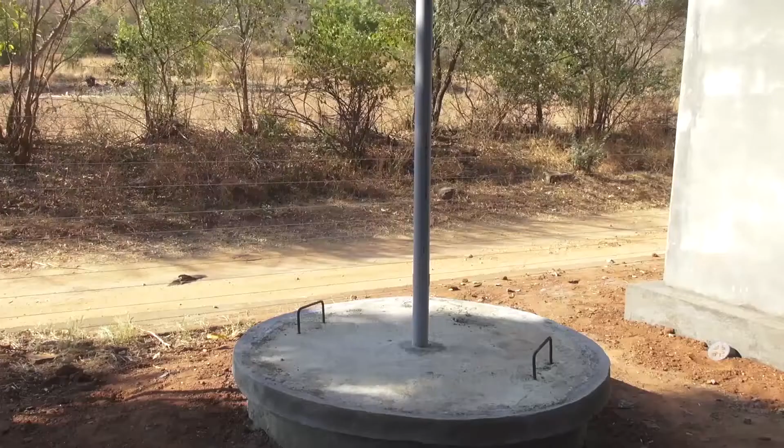Construction of concrete lid for leach pit. Lid covers the top part of the leach pit. It is the gateway for removing the solid waste from the pit. This can be circular or semicircular in shape.

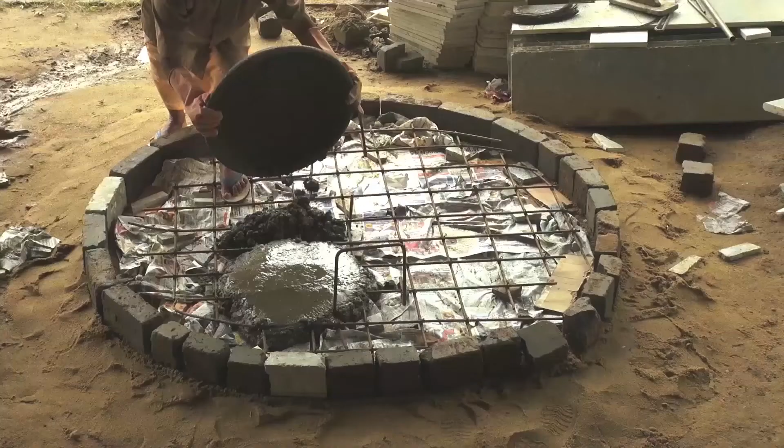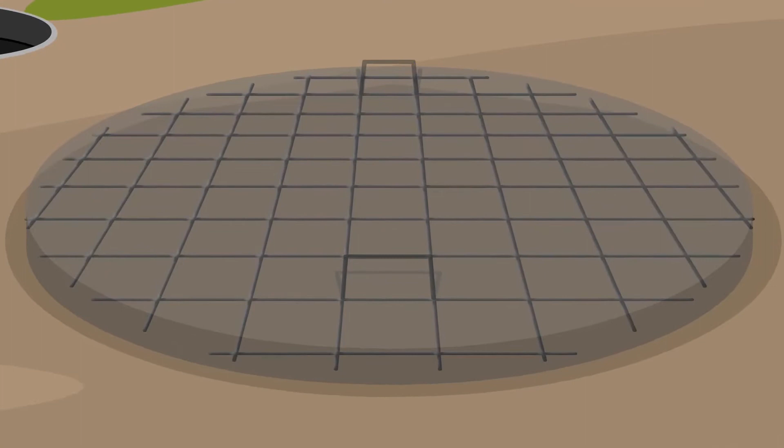In this session, we will see how to construct a concrete lid for the leach pit. At the end of this session, you will be able to construct concrete lid for the leach pit. The concrete lid consists of iron rods placed in a pattern inside a layer of RCC or reinforced cement concrete.

To construct the concrete lid, we will first make an iron mat by placing iron rods of lengths 143 centimeters, 137 centimeters, 123 centimeters, 98 centimeters, and 49 centimeters, horizontally and vertically. The rods are to be placed equidistantly at a distance of 15 centimeters.

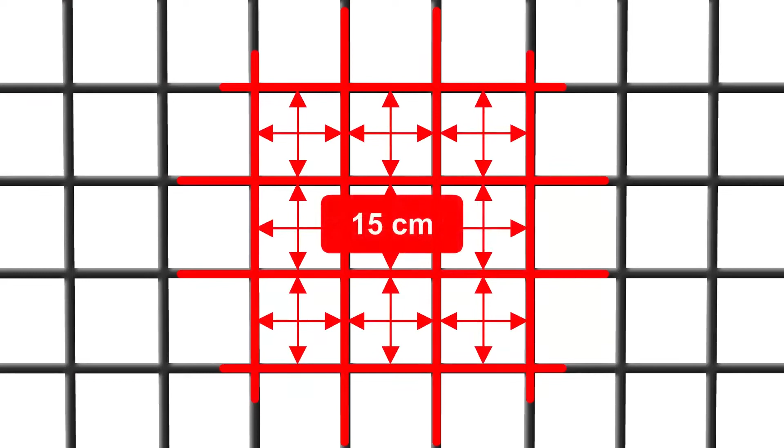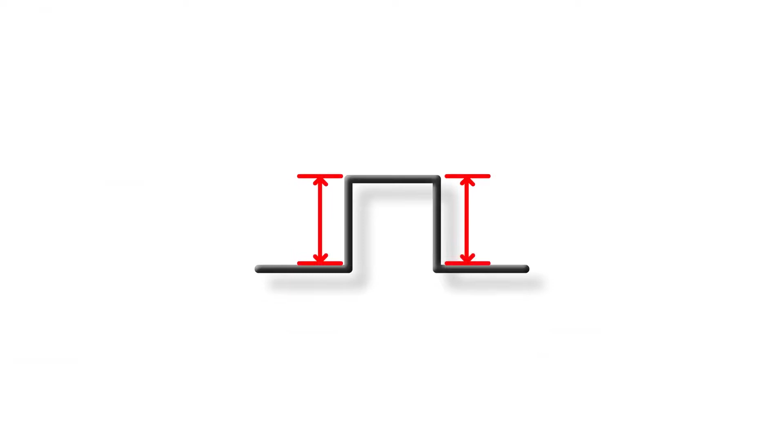Cover blocks of thickness 30 mm are placed below the iron mat. The handles for the concrete lid, with a height of 15 centimeters and a width of 15 centimeters, will be placed equidistantly from the center of the lid. We will then apply a layer of RCC to a thickness of 7.5 centimeters over the iron mat.

Let's take a look at the tools and materials required for constructing the concrete lid. The tools required are measuring tape, binding hook, mortar mixing pan, trowel, hacksaw blade, straight edge, bar bending pin, MS pipe of thickness 1 inch, and a hammer.

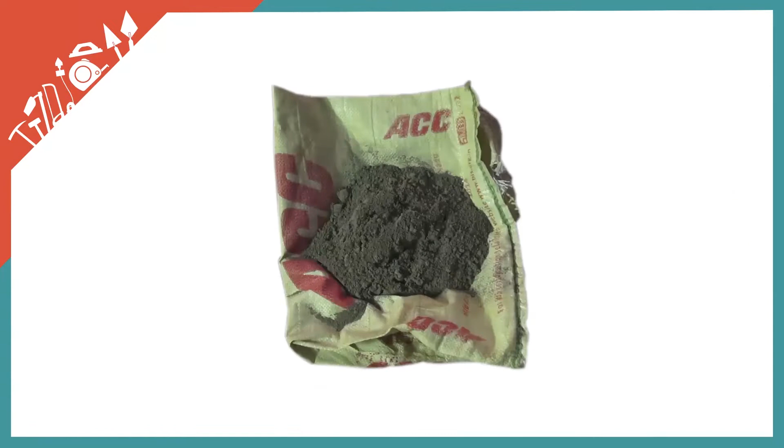The materials required are cement, 20 mm coarse aggregate, sand, 2.5 meters of iron rods of size 8 mm, binding wire, bricks, 30 mm cover blocks, reinforced cement concrete or RCC in the ratio of 1:1.5:3. That is, 1 part of cement, 1.5 parts of sand, and 3 parts of 20 mm coarse aggregate.

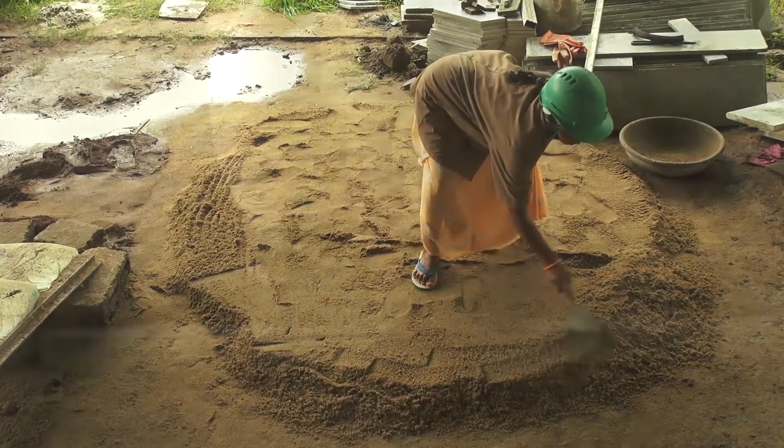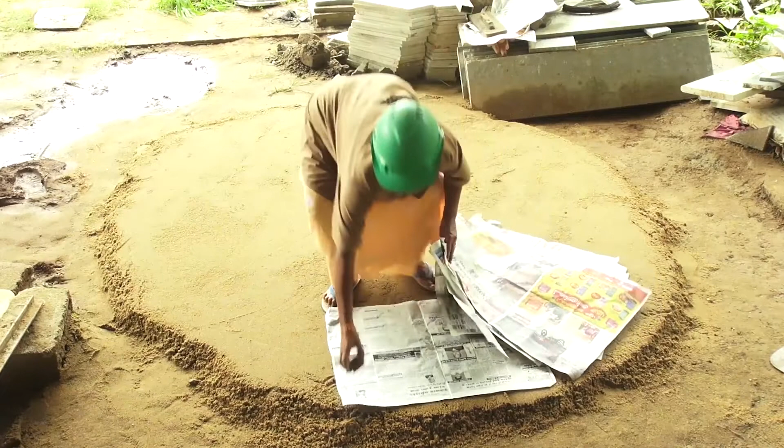Let us now see the steps involved in construction of the concrete lid. First, ensure that you have a leveled surface for constructing the concrete lid. For this, you could spread a layer of sand and level it. Now spread some sheets of newspaper over the leveled surface. Place 30 mm cover blocks over the paper.

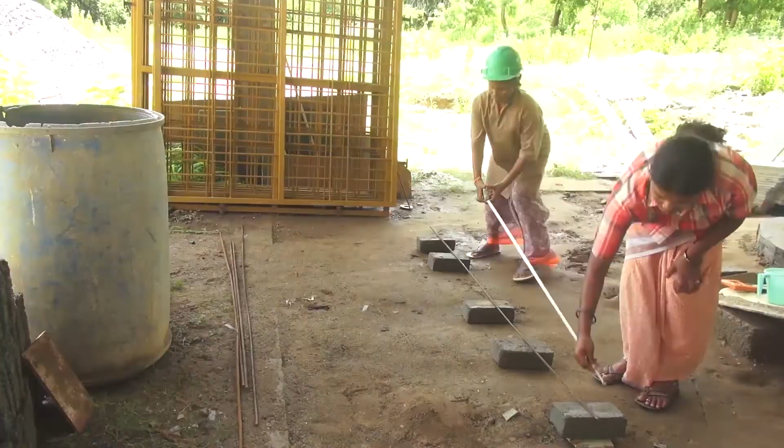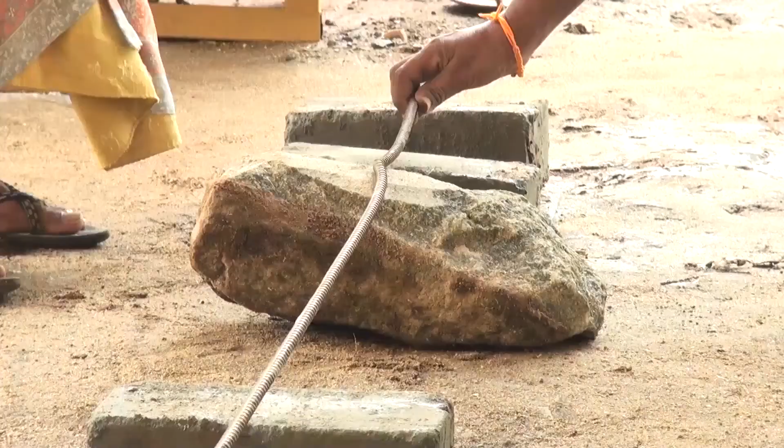We will now cut iron rods to the required lengths. Place the iron rod over a height and with the help of a measuring tape, mark a length of 143 centimeters. Now make a deep cut over the iron rod with the help of the hacksaw. Finally, cut the rod with a chisel as shown. Now straighten the rod with the help of a hammer.

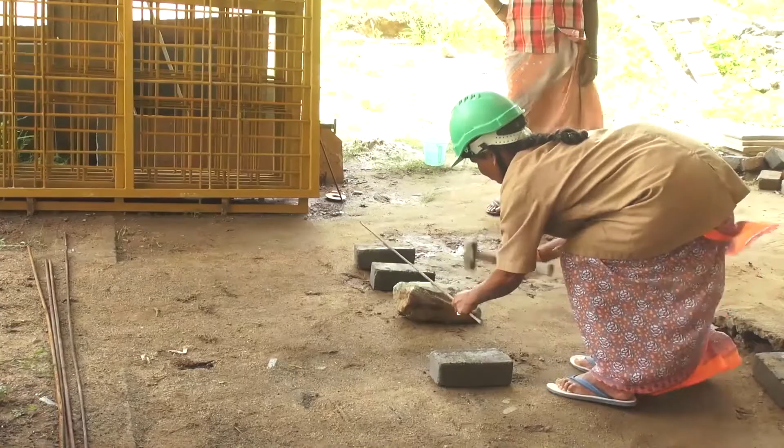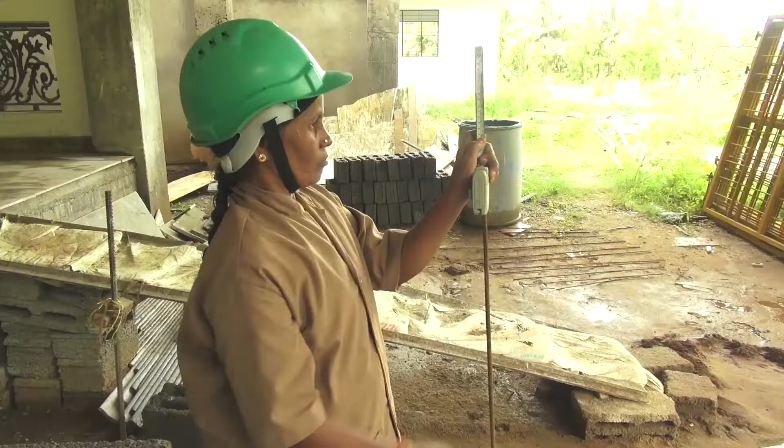We will require 4 rods of length 143 centimeters, 137 centimeters, 123 centimeters, 98 centimeters, and 49 centimeters. Mark lengths of 15 centimeters on these rods from top to bottom. This is required for placing them equidistantly as per the plan.

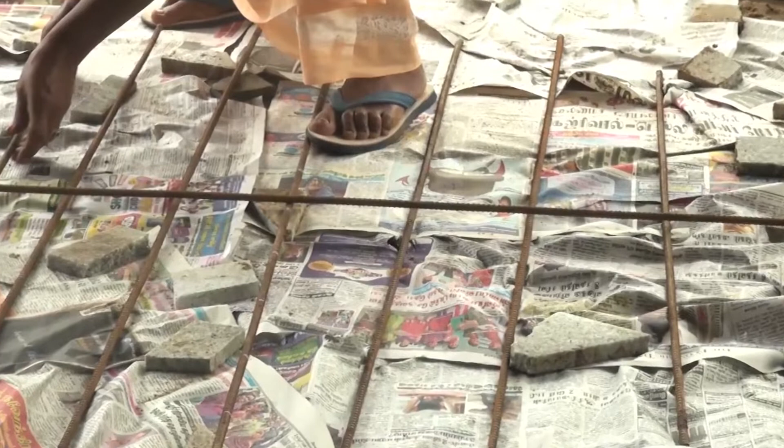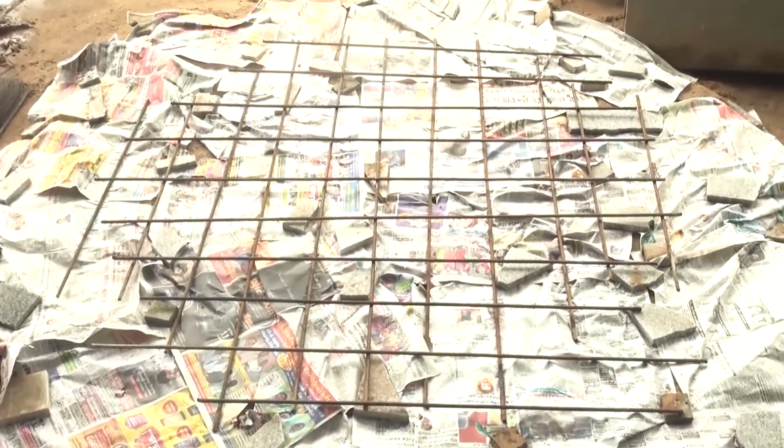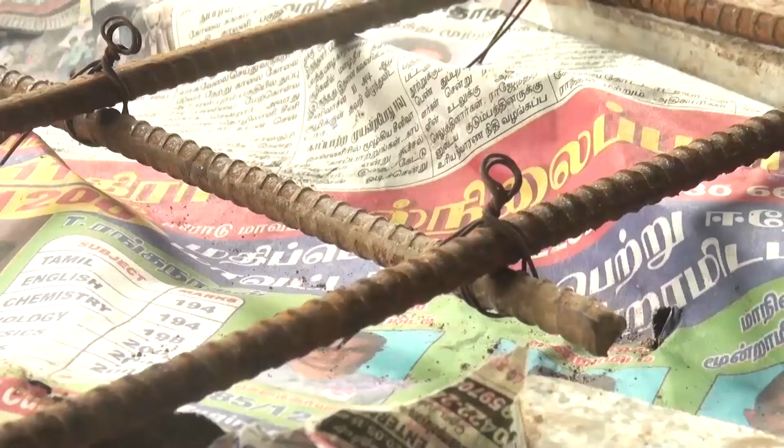Now let us see how to place the iron rods to form the iron mat. Place the iron rod of length 143 centimeters on the cover blocks horizontally and vertically. Place rods in the descending order of length from the center rod vertically on either side. This should be placed at a distance of 15 centimeters. In the same manner, place the rods horizontally. Using steel wire and binding hook, join the horizontal and vertical rods at the intersections. We have now made the iron mat for the lid.

We will now draw a circle to place bricks at the circumference. For this, fix a rod at the center of the iron mat. Tie a thread to it. Measure and mark 75 centimeters on the thread. Now draw a circle of radius 75 centimeters.

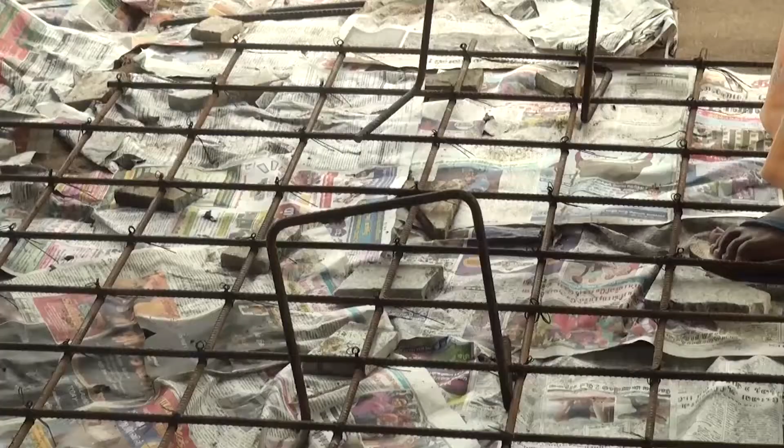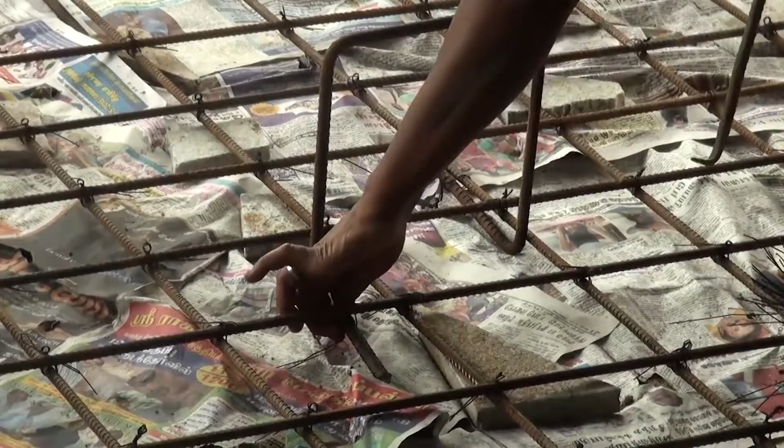We will now fix handles to the iron mat. Place two handles at an equidistant point from the center of the iron mat. Now join the handles to the mat. Now we will pour RCC over the iron mat. Start placing bricks of thickness 7.5 centimeters at the circumference of the circle drawn earlier.

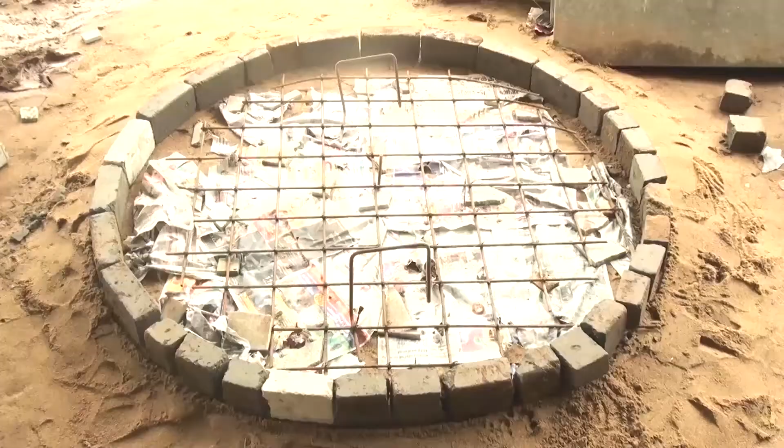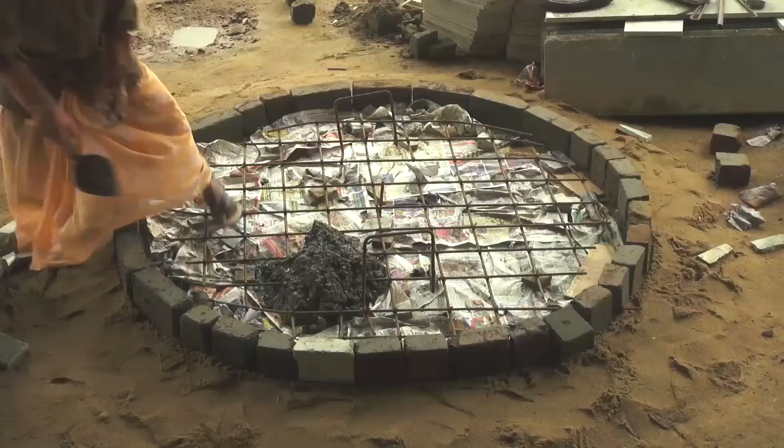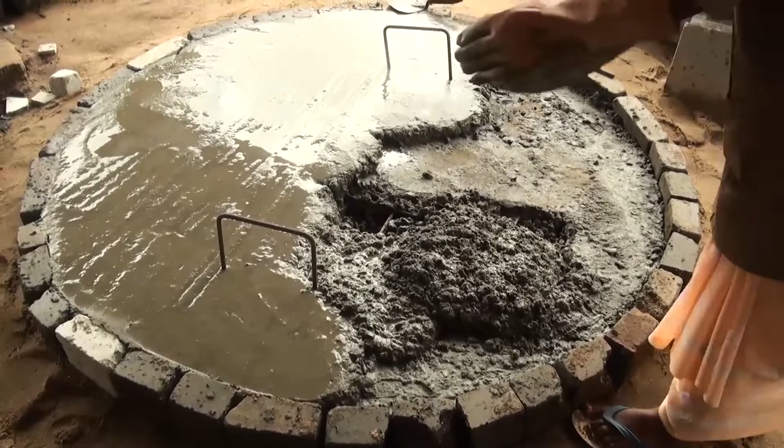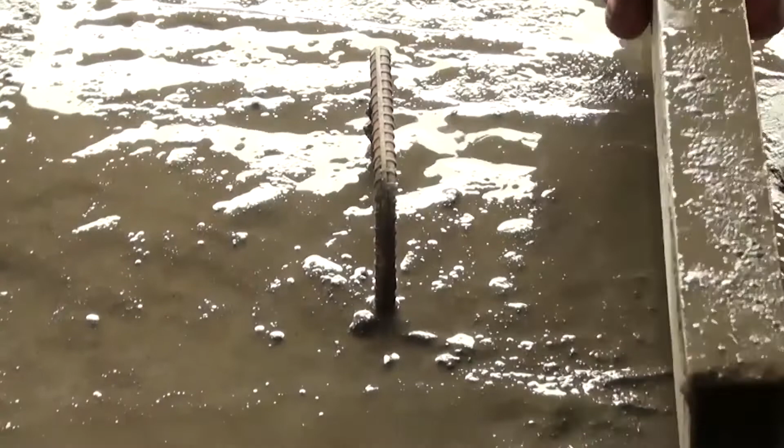This circle made of bricks will be the area for pouring the RCC. Pour RCC over the iron mat up to the height of the bricks. Use a trowel to spread it inside uniformly. Use straight edge to remove the air bubbles trapped inside by gently tapping on the surface of the lid.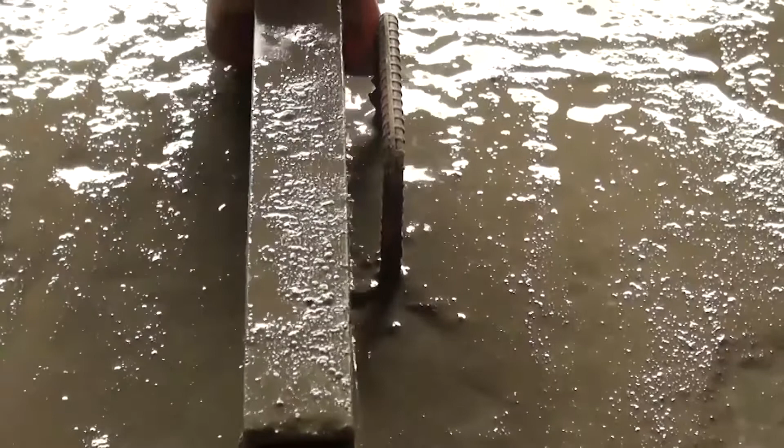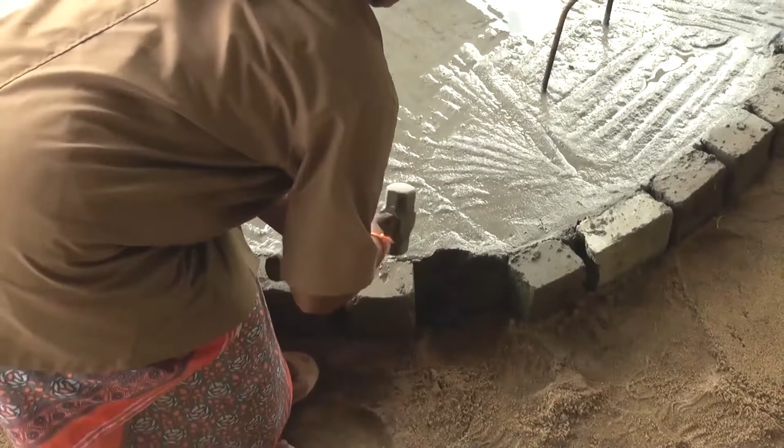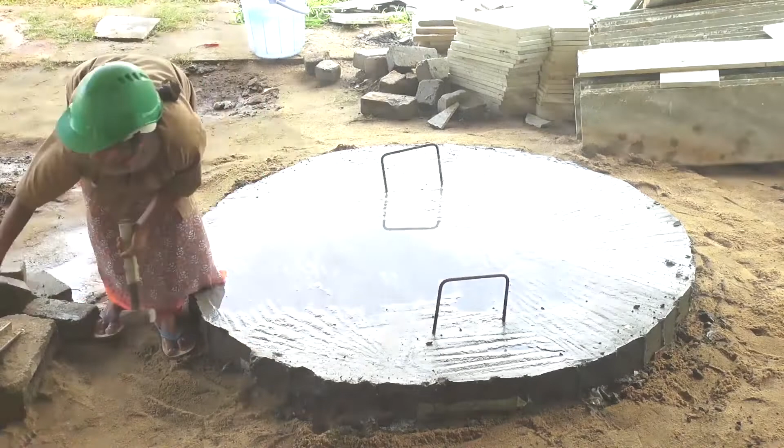Allow the lid to cure for 7 days. Wet the lid at regular intervals. We can now remove the bricks by gently tapping on it using a hammer. Chisel the projections on the outer surface of the lid using a trowel.

We have now successfully completed the construction of the concrete lid. With that, we've come to the end of this session. In this session, we have learnt to construct the concrete lid for the leach pit.